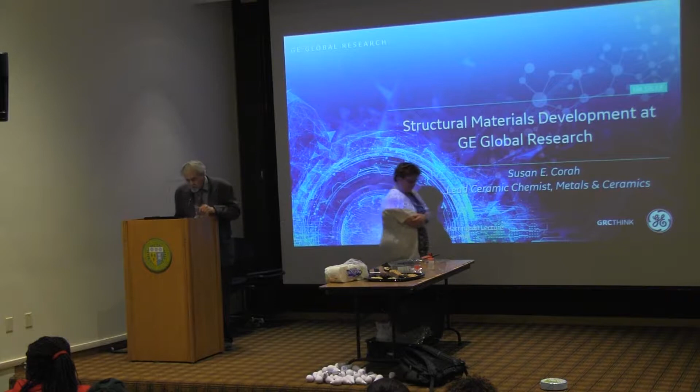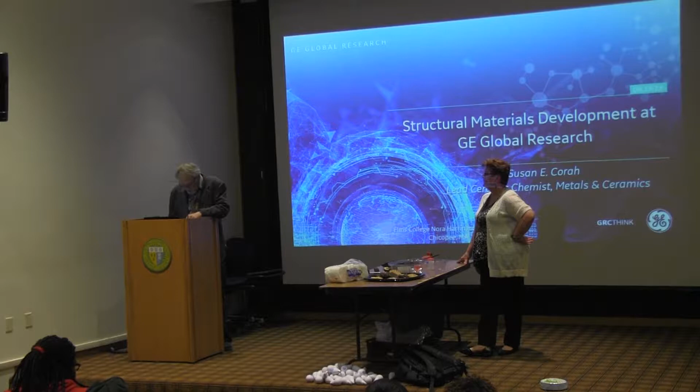This is the 35th in an annual lecture series established to honor the teaching service of Sister Nora Harrington. Sister Nora taught chemistry and physics at the Elms for 32 years, and in that time built a tradition of excellence in the teaching of physical science. We offer these lectures to you to promote inquiry and scholarship, ideals that Sister herself embraced. Although Sister Nora has passed, her legacy continues.

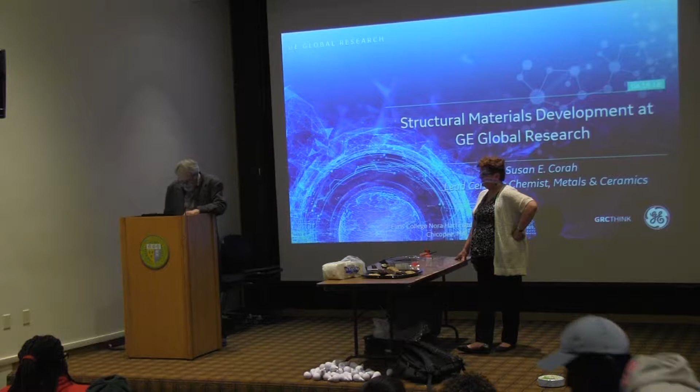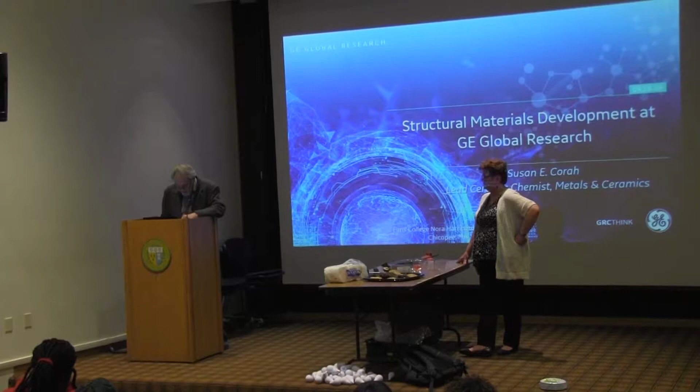It's my pleasure now to introduce our speaker, Susan Corah. Susan graduated from the Elms in 1981 with a BA in biology. Shortly thereafter, she graduated from North Adams State College in 1985 with a bachelor's in chemistry. Her first job was working as a research scientist at Sprague Electric Company in North Adams. Throughout her professional career, she has worked as a research scientist, chemist, and process engineer for different companies, as well as a quality engineering consultant for different laboratories. She started at GE Global Research in 2012. Today, she is lead ceramic chemist at GE.

She has an impressive record of accomplishment. She is the recipient of numerous awards at GE. In her professional life, she is the co-author of 5 U.S. patents. She will talk with us tonight about research at GE Global. The title of her talk is Structural Materials Development at GE Global Research. I give you Susan Corah.

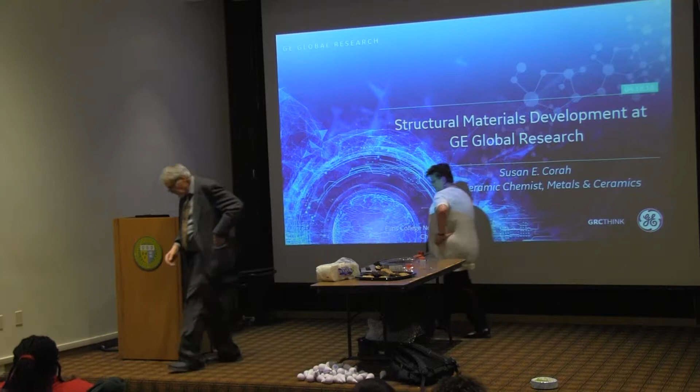Thank you very much, and thanks for being patient with my laptop. GE laptops are notorious for working extremely well in pressure-type situations. I'm sure you're all aware.

I'm going to talk to you about some of the work that we're doing at GE Global Research in Niskayuna on structural materials. Basically, structural materials are ceramics and metals, polymers, and composites. So we'll go through a number of slides talking about some of that and what the structure and mechanical properties mean. And then I'm going to shift a little bit over toward our aviation business because most of our structural materials organization focuses on the materials work that we do for aviation in Cincinnati and across the country. And there are some exciting developments with materials that have happened in the past couple of years.

And then on the poster, there's just a little reference to when pigs can fly. We'll talk about a particular composite material that's 25 years in the making and finally is getting on some of the aircraft engines.

So how did I get here from here? So, 81 graduate of the Elms, great experience here. A couple of my classmates are here. It's great to see them. We're going to go out and eat something later.

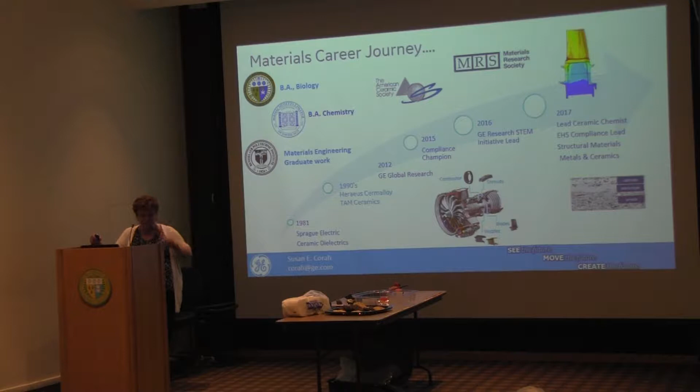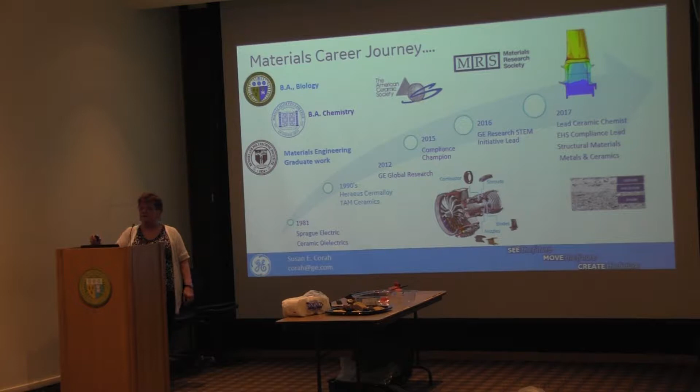I'm a lead ceramic chemist for my organization, and EHS compliance lead. Our new organizational structure is called Structural Materials, and I'm part of Metals and Ceramics. So we'll talk a little bit about GE in general.

How can you survive for centuries? GE was founded in 1892 in Schenectady, New York, a stone's throw from where our GE Global Research World Headquarters is currently. It was founded by the leading scientists of the day: Thomas Edison, Elihu Thomson, and Charles Steinmetz. They essentially built this research lab in somebody's backyard garage. They decided they wanted to have some sort of electromagnetic lab available for all sorts of innovations.

So GE Global Research itself was founded in 1900, and it's been going strong ever since. We go through lots of iterations on things that we focus on, but currently we're doing lots of work in support of our GE businesses.

So we have a very strong track record of innovation and invention. If you look at some of the things that have come out of the GE labs: 1879, carbon filament incandescent lamp; 1895, largest electric locomotive; 1896, first X-ray machine; 1941, first U.S. jet engine; and on through 2014 with our record-breaking hot gas turbine.

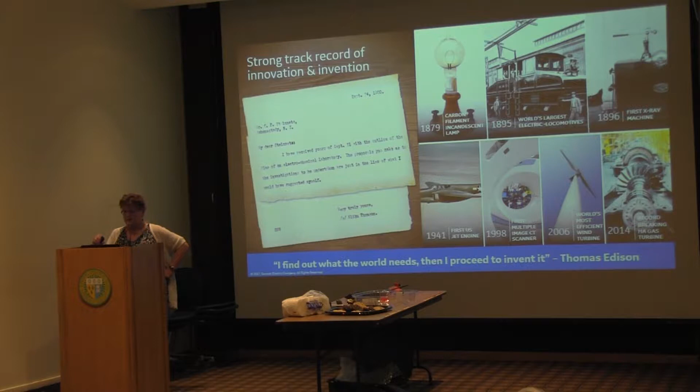So GE Global Research, we're the center of this circle. I tell graduate students a lot of times when I'm working with them, because they're used to the kind of research they're doing in their master's and PhD programs, that if you see the word research in our sign, it doesn't mean research for research's sake. We don't come in on a Monday morning and say, gee, I thought of this over the weekend, I'm going to go to the lab and do this.

We are business-based research. So if you see all the things our businesses touch here, power, aviation, healthcare, transportation, oil and gas, renewable energy, these are our customers. At GE Global Research, we behave almost like a manufacturing operation, in that the businesses are our customers, and like any manufacturing operation, we have deliverables and goals that we have to meet.

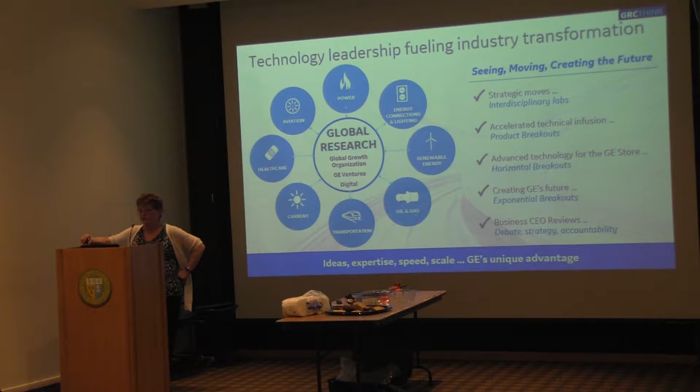So what exactly are structural materials? When you think structural materials, think of things that go into your cars or

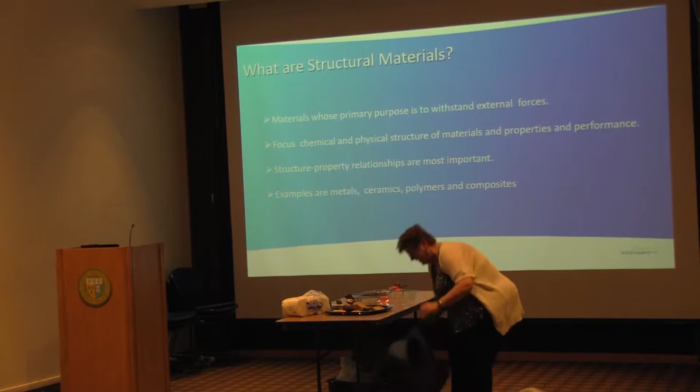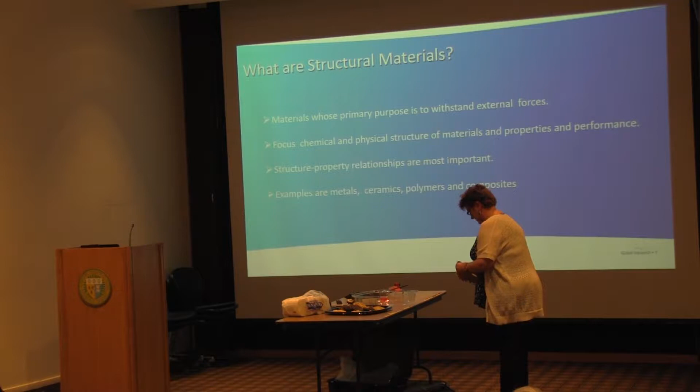That's my dog. Excuse me, sorry about that. So let me continue to talk about it. I knew there was something I forgot to do before I got up here. And no, my dog doesn't exactly call me. So,

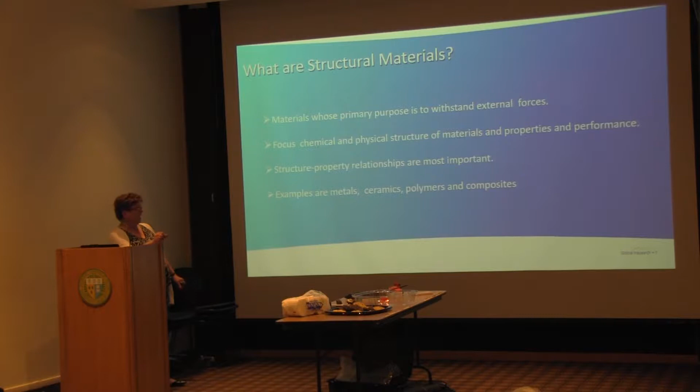the primary purpose of a structural material is to withstand external forces. It's got to be a really strong material. So we're looking at the chemical and physical structures of those materials, and we're aligning them with certain properties and performance. So we're actually looking at mechanical type performance for these materials.

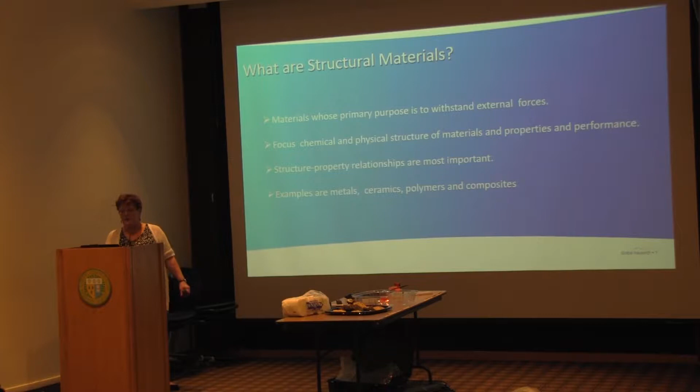Four examples of them are metals, ceramics, polymers, and composites. Composites are combinations of any of these kind of squished together. That's the technical term, squished.

So what does our team look like at GE Global Research? We have over 150 technologists that support structural materials. In Niskayuna, we have ceramics and metals, which is my organization, coatings, characterization, manufacturing, and materials behavior.

The materials behavior guys are the ones who do all the mechanical testing to determine whether or not the materials that we're creating actually are achieving what they were meant to do.

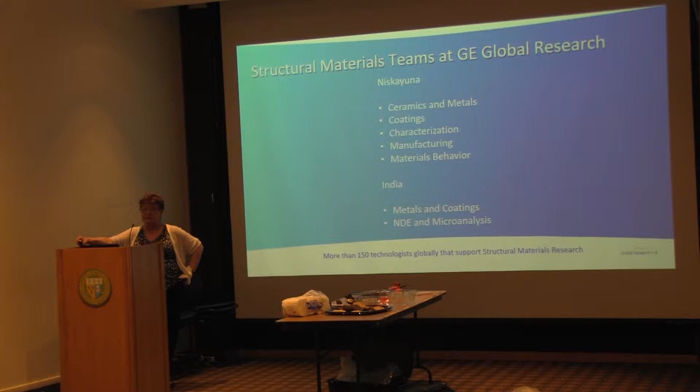In India, we have folks that work on metals and coating, and also non-destructive evaluation and microanalysis.

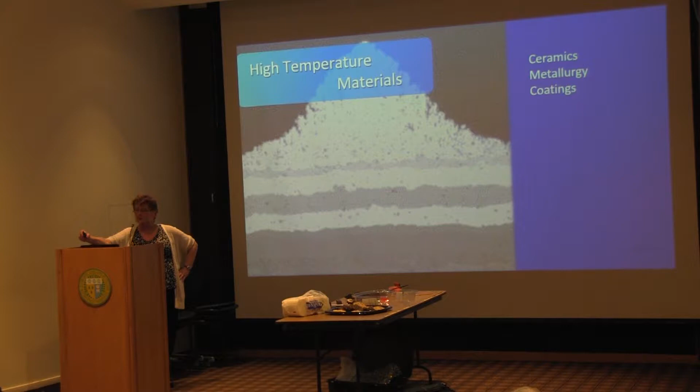So we're going to talk a lot about high temperature materials today, and of three different groups: ceramics, metals, and coatings. So we use some traditional metallurgical techniques. For example, this piece of equipment, it's a 1,000-ton forging press.

This is the very old-fashioned way that we're making new alloys that are better and stronger. One of the cool things that we do when we bring in our school groups—this is in my building, actually—we bring them in, and we have a great team of people who volunteer to do the demo for this.

They get all suited up in their safety heat suits, and especially for the little kids, it's very exciting because they take a red hot brick out of a furnace that's probably at about 2000 F or 2100 F. So it's blazing red hot.

It goes into the forge, they apply the pressure, the thing just smashes down to a circular bowl, and they take it from the press and put it in some cooling water, and steam is everywhere, and the kids are like, ah. It's very exciting. It's an old-fashioned technique, but it works very well for some of our processes.

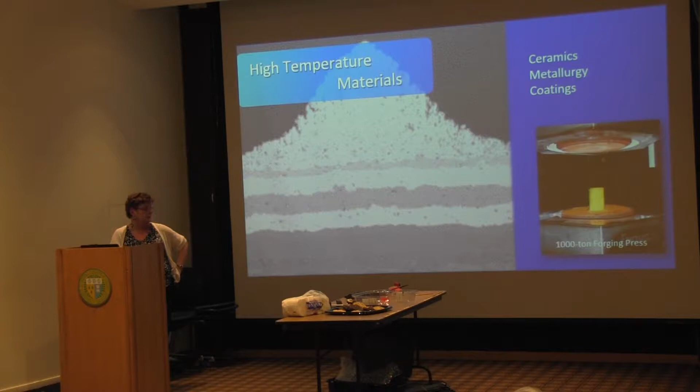And this right here is—I can't be standing here in 2018 and not mentioning something about robotic technology. That's become very, very big for us. But these actually are thermal spray robots, and this is actually an aviation blade.

We've gotten to the point with our materials, we can use this hot plasma spray and the two robots to actually get 12 degrees of freedom in which to spray our material onto the blade that's going to go into an engine somewhere. So it's very exciting stuff.

So why are we talking high temperature materials? If we're talking aviation, imagine you're sitting on an airplane down at Bradley and you're getting ready to go somewhere. There are three different conditions that we have to look at with regards to temperature: takeoff, climb, and cruise. So it makes sense if you think about it.

What kind of energy are you going to need on takeoff? You're going to need something that's very, very high energy, that is at a very high temperature. Temperature ranges on takeoff can probably be anywhere around 2200 F on those engines.

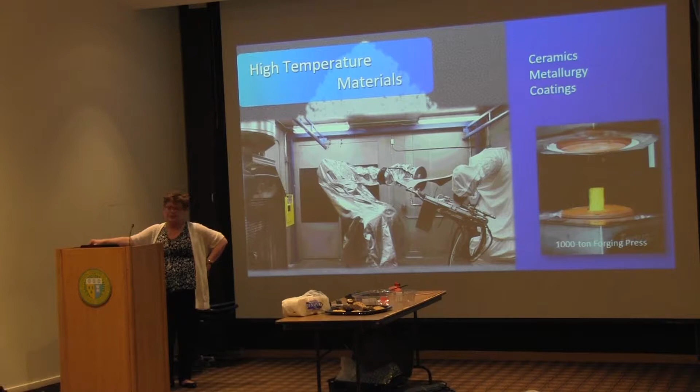And then consider climb. Takeoff requires a lot of energy. Climb also is going to require quite a bit of energy. And then you get to cruise altitude. Now at cruise altitude, your temperature is going to be a little bit less, but you're still going to be probably running about 2000 F.

So just imagine the kind of materials that you have to have on these engines in order to be able to be stable at these temperatures.

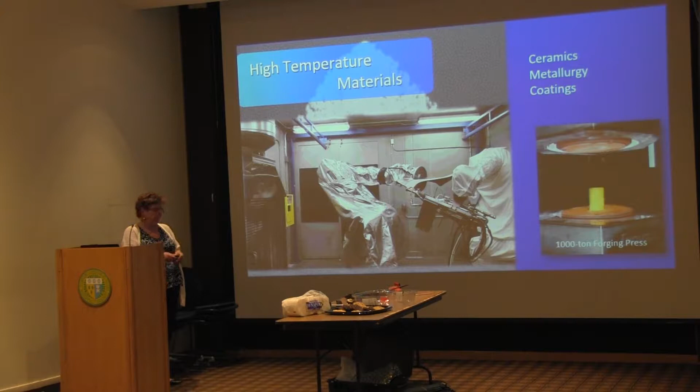So one very important part of what we do in structural materials is, as you can imagine, we do a lot of material characterization, because if we're looking at structure property relationships, we need to be able to have data that tells us about composition, mechanical strength, and several other types of characterization.

So internal capabilities—if we don't have them internally, you can see on the right, there are a few external partners that we work with, including a couple of universities.

So if we can't do it on site, we have partners that we can work with. We do imaging and analysis, and through that we can do some topography and chemistry of the surfaces.

We do a lot of X-ray diffraction. We also can do structural analysis through X-ray diffraction. We study crystal structure to see what the best crystal structures are for these materials.

We can do compositional analysis, because many of the materials we use, be it a metal alloy or some sort of ceramic thermal barrier coating or an environmental barrier coating, it's generally a mixture of materials, and it's good to have some compositional background behind us.

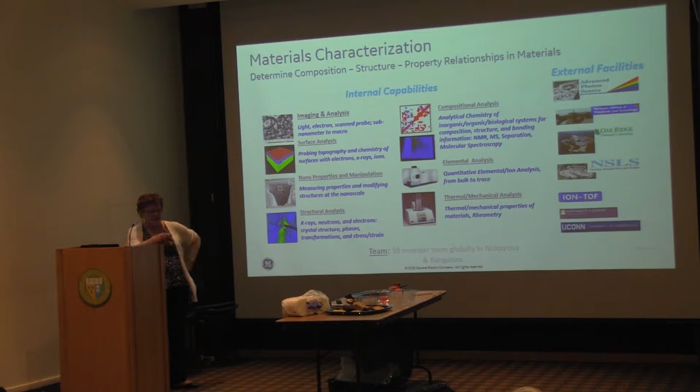A new technology that has emerged probably within the past 5 or 6 years is actually powder rheology, which is called rheometry. The pharmaceutical industry uses this quite a bit, and one of the basic important things you get from the data on this is a measure of flowability of the powder.

In its raw handling, most things that we work with start in a powder form. So we have ceramic powders, or metal powders, or metal alloy powders. Knowing how these things flow is very important.

So the particular instrument that's available now, top of the line globally, measures several different properties of a powder: flowability, tap density, bulk density, a lot of very valuable information.

For flowability, if you consider additive manufacturing, there are a couple of different ways that additive happens, but one of the ways is a laser melting process, direct metal laser melting. In that condition, flowability of powder is very, very important because it actually has to flow down a feed tube and onto the platform, and a laser will then hit it and melt it. So flowability is very important.

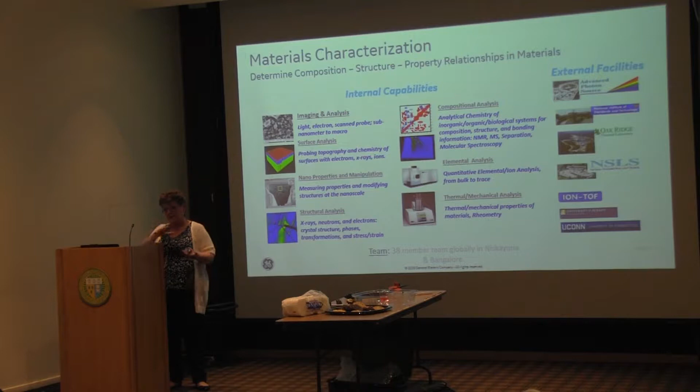The other thing we do a lot of characterization on is particle size and particle morphology, because, like I said, we start with powders all the way around, and it's important to know what kind of size particles you're dealing with, in terms of how many microns this is, or how wide the distribution is. Sometimes we use that data as an advantage to help us design a structured particle packing for maximum densification.

Okay, here we're going to talk just a little bit about two GE engines that are out in the field right now. On the left, this is the GEnx, and this is the GE 9X.

So the materials that we use on these, very important alloys: nickel, titanium, and iron, as well as combining them with different ceramics and polymers.

So we talk about some of the process technologies here. There are castings that are involved with ceramics where we actually develop a mold that then is covered in wax, and we're actually able to use that model to make the metal castings for some of the blades.

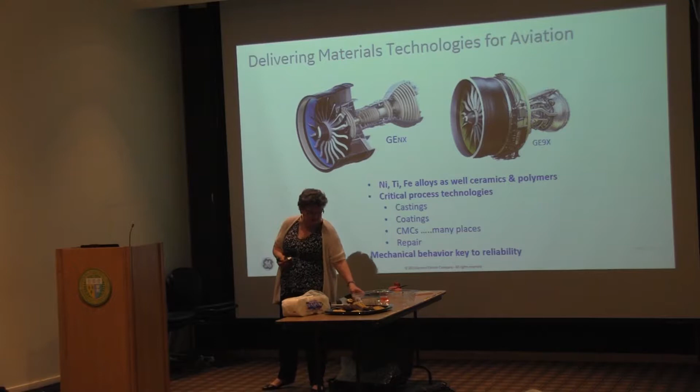And I have this actual ceramic casting of an engine blade. I'm not exactly sure which one it's from, it might be from the LEAP engine. But from this ceramic casting, we can go to a casting house and come up with this piece of an engine blade.

Coatings are also important. We have two types of coatings that we work with regularly: environmental barrier coatings and thermal barrier coatings. Both of those coatings are meant to protect the alloy or the bond coat that's underneath it. Thermal barrier coatings are developed to withstand very, very high temperatures, and ultimately will protect the hardware that's underneath it. I think a little later on we have a picture of that.

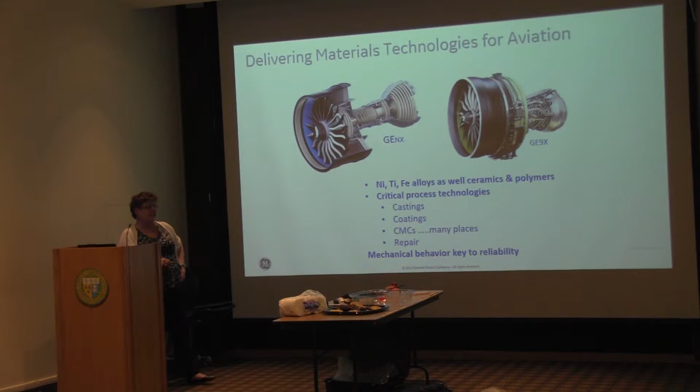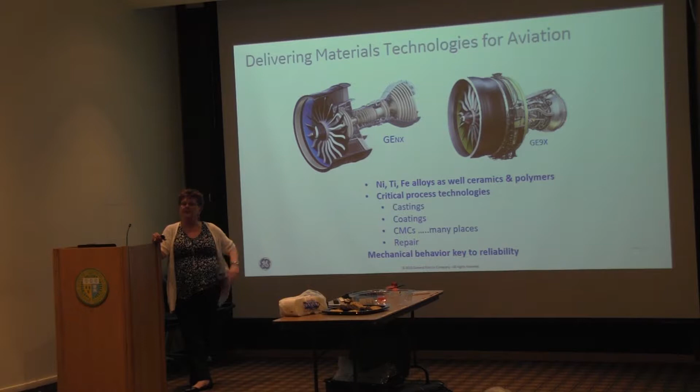That's what they're looking for. The other thing we do is something called repair, and we're working on some in-situ repair type scenarios. We have materials available now where when an aircraft engine comes in for inspection, if there are any defects, we have the means to go in and actually repair those on wing.

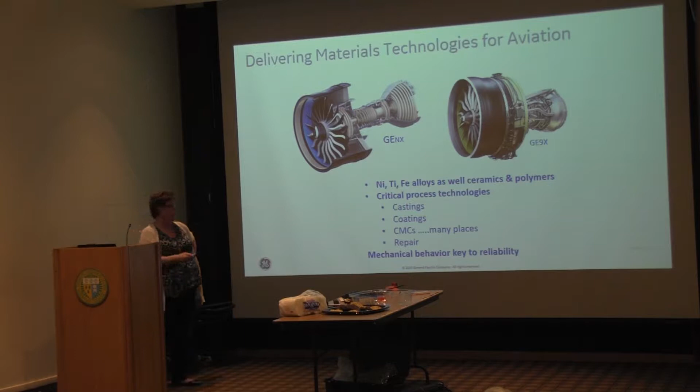Oh, and these are videos that don't work. I'll share them with Dr. Drake when I get back to work tomorrow, and he can share them with you guys if you want to see them. What these actually are, I have to tell you, I watched them for the first time yesterday. It's a really sexy video of the whole engine, and it all flies around in pieces and parts. It's very impressive. I'm sure you would have liked it if it had worked. But I can pass those along to you if you're interested.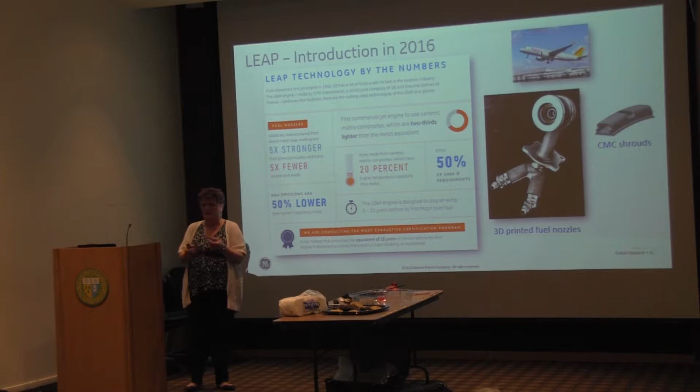You've got fuel nozzles that are additively manufactured. Through one of the processes we use, whether it's DMLM or another one, it's 5 times stronger. Because it's built in one piece, there are 5 times fewer brazes and welds. Consider a fuel nozzle that's traditionally built - in order to put the whole thing together and make it very uniform, it has to be brazed or welded to make sure all the connections are made. But when you 3D print something like this, you don't have as many opportunities where you have to have a braze or weld. So NOx emissions are lower.

Everybody loves that. And this is the first commercial jet engine that uses ceramic matrix composites, and we'll talk a little bit about how those are made. It's two-thirds lighter than the metal equivalent. That's a lot - that is significant here.

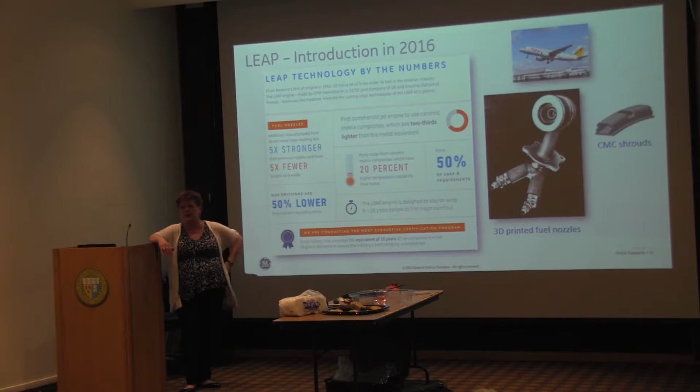This is designed to stay on wing for 8 to 10 years before the first major overhaul. That doesn't mean they don't come in for inspection or what's called an outage, which sounds like a really weird word to use, but there are scheduled outages for most of these aircraft engines - a determined schedule, a determined amount of time when an engine has to come off and be inspected or replaced. But this is designed to last significantly longer. And there's your 3D printed fuel nozzle, and this is a CMC shroud.

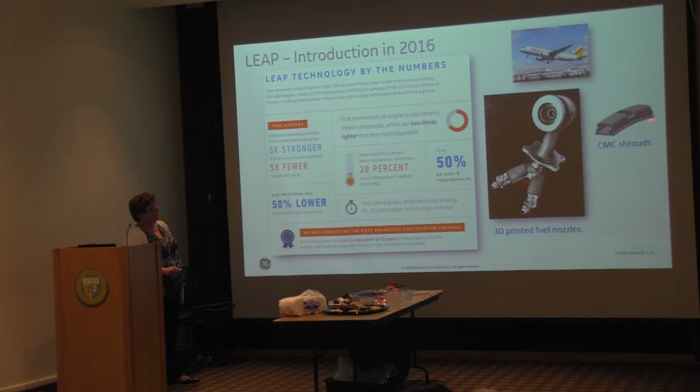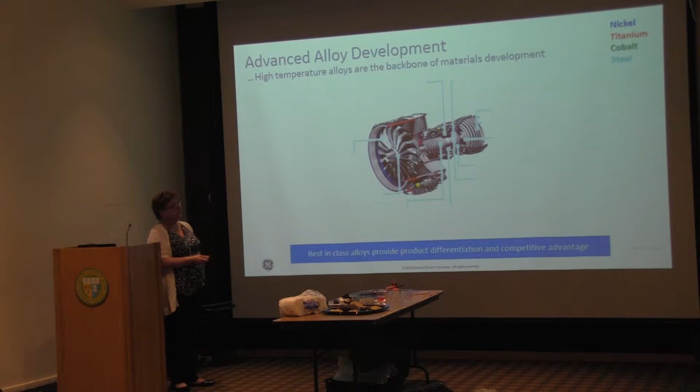So what kinds of alloys do we use on these engines? There are four: nickel, titanium, cobalt, and steel. The nickel alloys are found in the blades shown here and some of the rotors. We've got some nickel alloy seals in this part of the engine, and then high temperature nickel alloy for the blades and vanes here. The titanium alloys are found - it's a titanium aluminide - in the blades here, and then we've got a fan and a rotor that is the titanium alloy here.

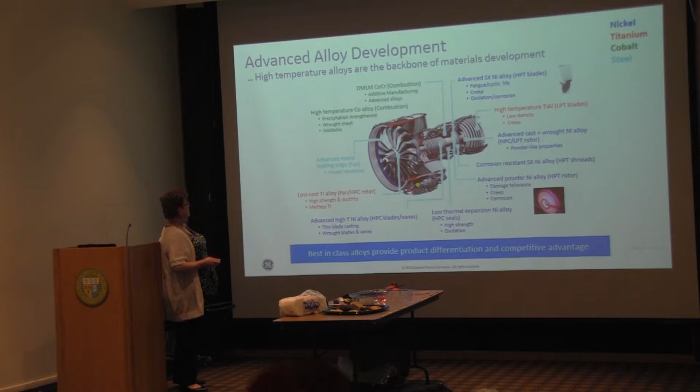With cobalt, this is the DMLM cobalt combustion - that's the direct metal laser melting portion. Also in the combustor liner, we've got high temperature cobalt alloy. And then with steel, we've got it right here, the leading edge on the fan blade.

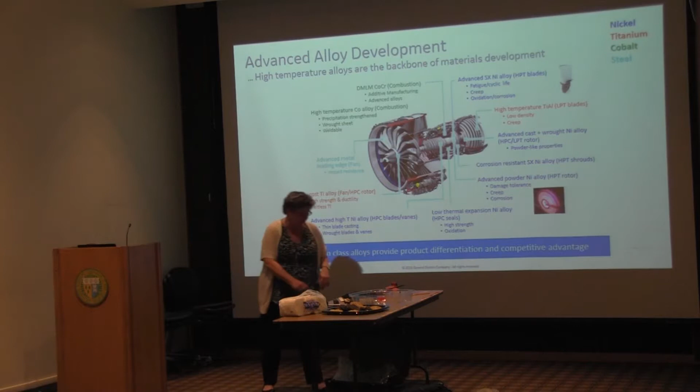So what's a leading edge? The way the fan blades are put together, a leading edge is the edge that actually sees the environment first when it's on an engine. If you think about it, that provides probably the best opportunity to have problems with environmental issues hitting the edges. So if we have coatings, we may find much more deterioration on the leading edge than on the rest of the blade.

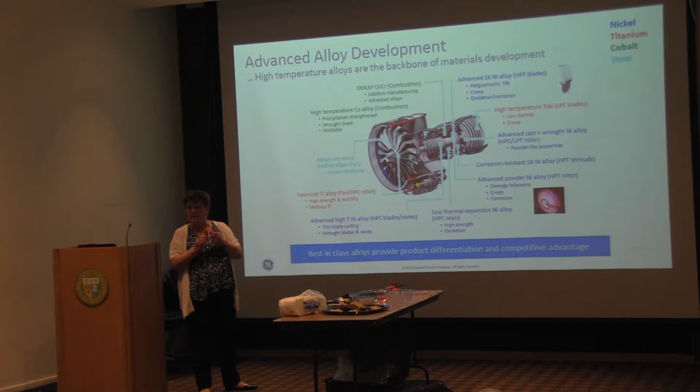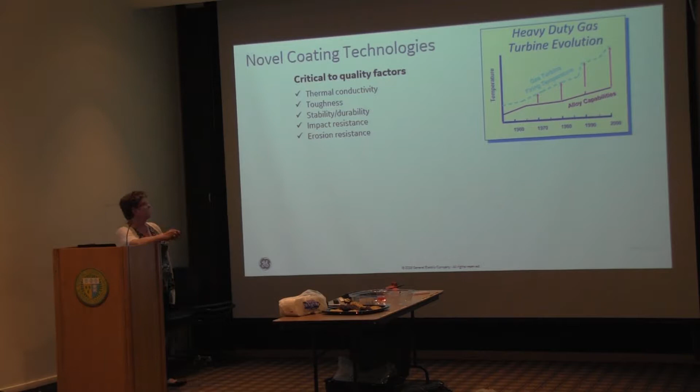We have some novel coating technologies that I'll go over briefly. The critical to quality factors we're looking for include thermal conductivity, toughness, stability, durability, impact resistance, erosion resistance, and the last one is CMAS resistance.

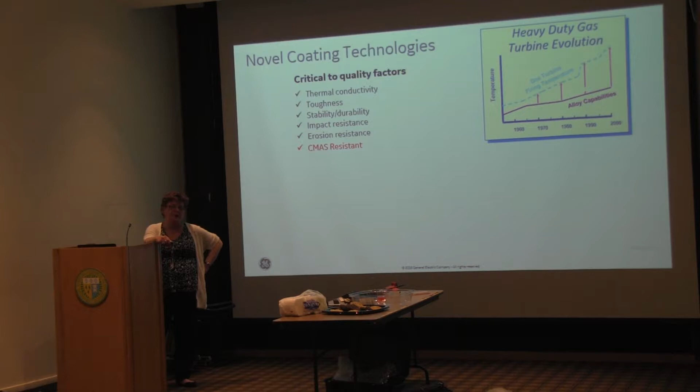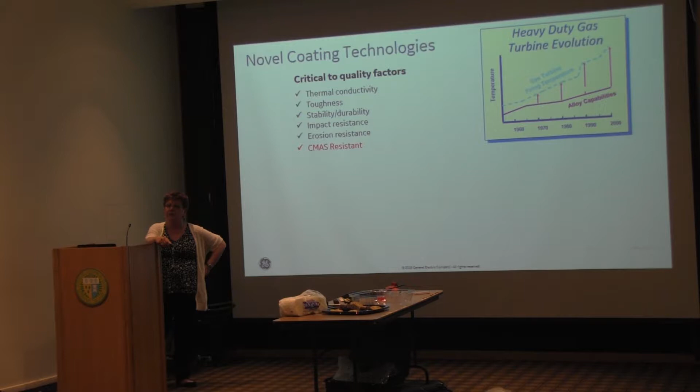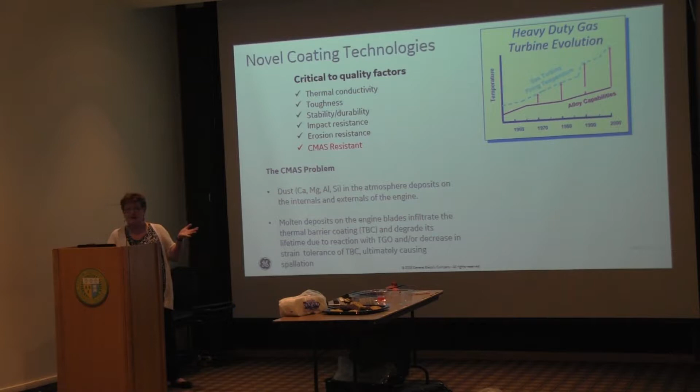Think about an aircraft engine flying in the Middle East. There are different environmental factors that engine will run into that you don't see flying in the States or other parts of the world. Essentially, CMAS is a combination of calcium, magnesium, aluminum, and silica. It's a silicate, essentially a glass. The problem is that it deposits on the engine blades and eats through the thermal barrier coating, decaying it.

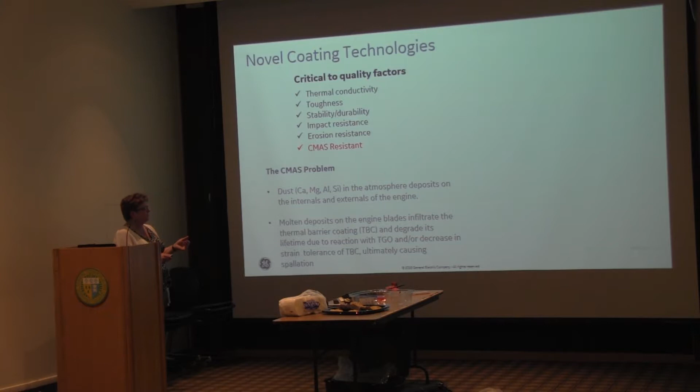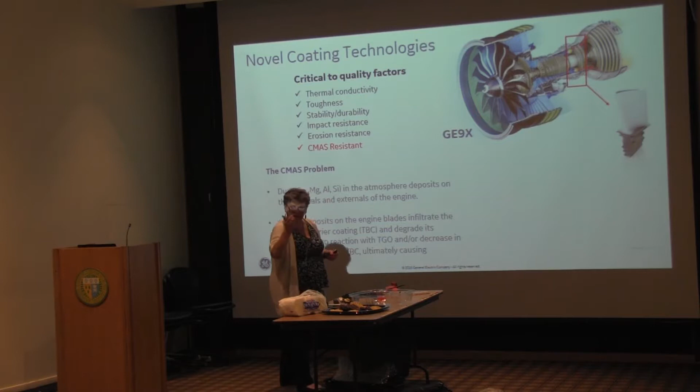So these are the blades, and this one actually has a TBC coating on it. If you see, this is a bare blade, and this one has the coating. This is a piece of hardware, the same blade, that's actually been fielded and taken off of an engine.

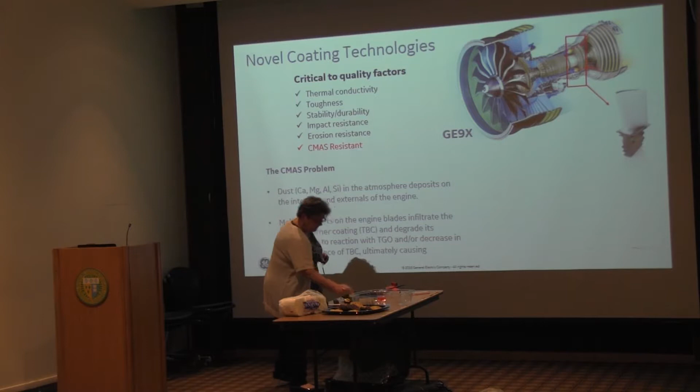This is kind of how the composition goes on many of these parts. Here's your super alloy substrate, whatever we talked about on the slide before. You've got a bond coat here, which bonds the alloy to this thermal barrier coating, a zirconia composition ceramic material. By putting this thermal barrier coating here, we can get to a higher firing temperature, reduced cooling air, and a longer component life.

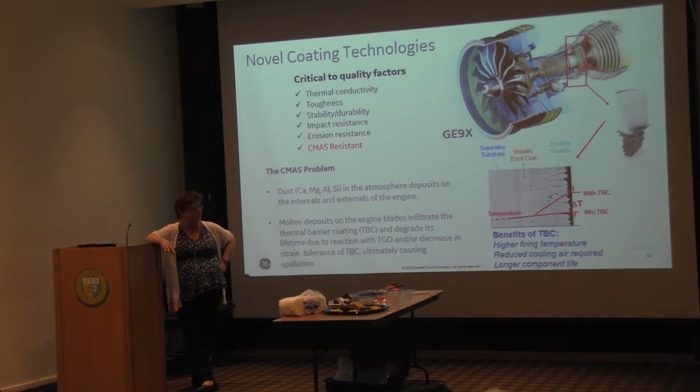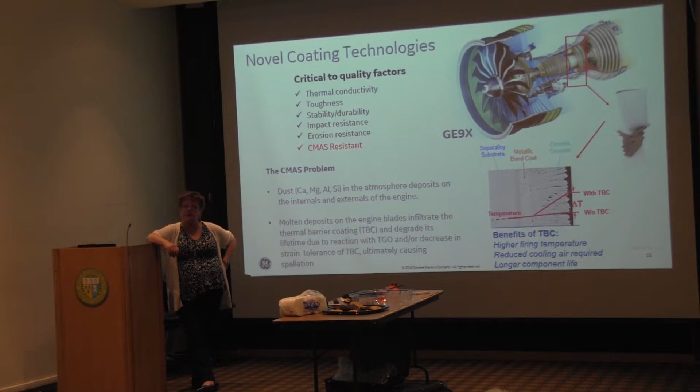If you're thinking about this, you might ask, how are you going to sinter something that's already on an engine? What we do is use the high temperature cycles to actually sinter the ceramic material that's on the blade. So no additional steps are needed—it just sinters as the engines are cycled.

We have to do a little bit of robotics here because it's 2018 and it's cool. So there's something we've developed called Turbine Surgeon. These are actually little tiny robots that can be deployed inside the engine, going in between some of these blades, doing a different type of inspection.

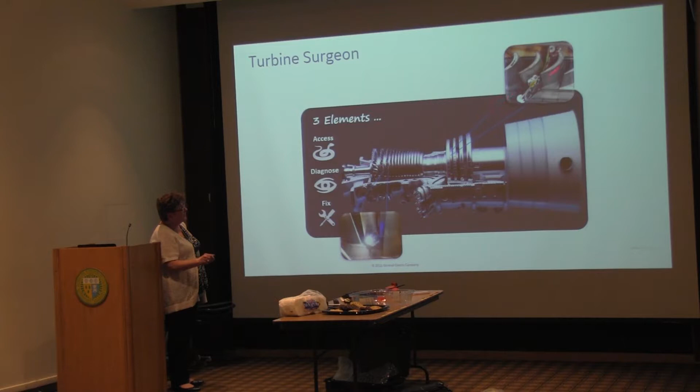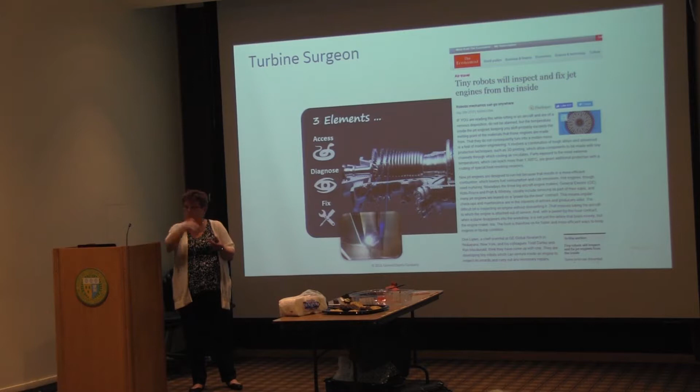Tiny robots will inspect and fix jet engines from the inside. This is part of my team—I work with these guys. It's very exciting. Our robotics professionals here have the coolest little robots called crawlers, little mini robots that can crawl around in the engine and do an inspection. They also have magnetic crawlers, which are very beneficial if there's magnetic material we're using there, because they don't fall off the surface as they're going through. It's a pretty exciting time for this.

Are you going to go? Oop, sorry, one back. All right, so old inspection technology.

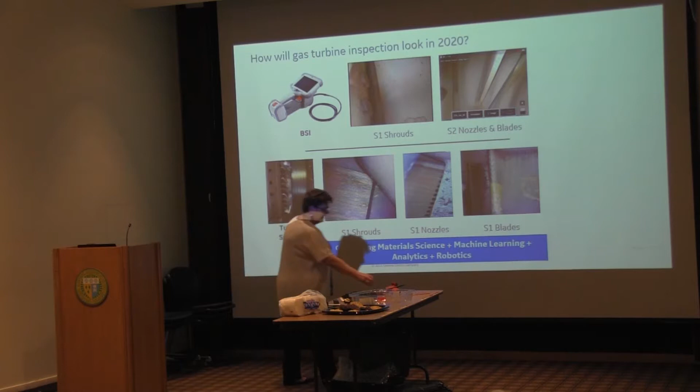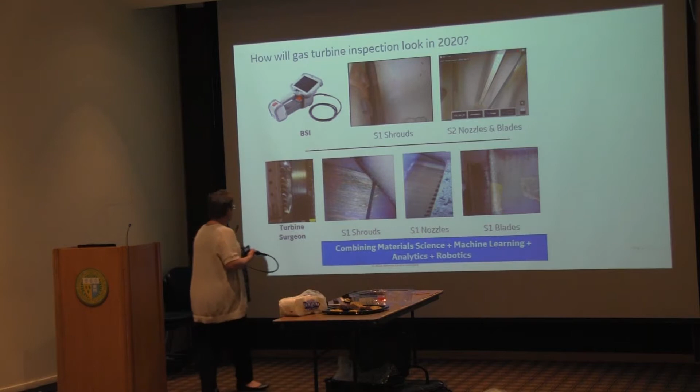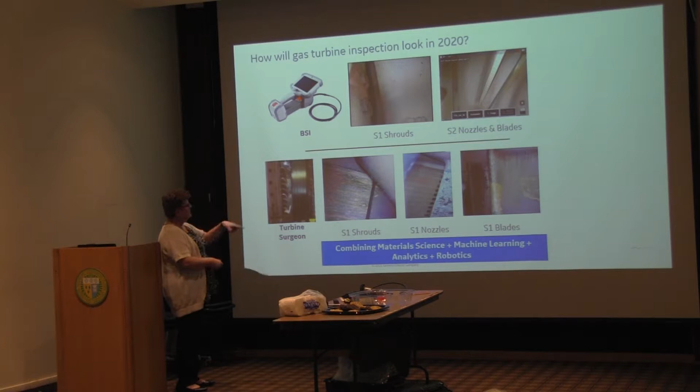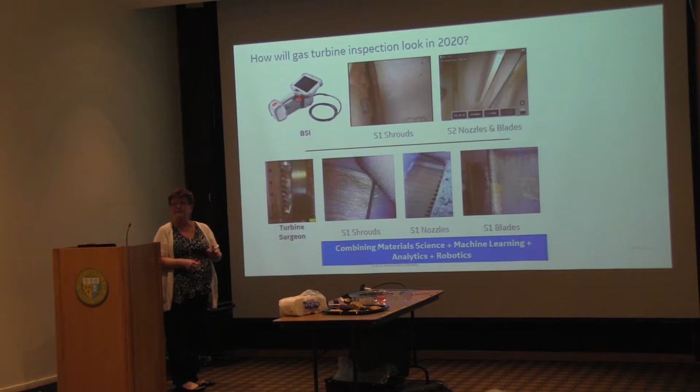This is a borescope, basically a fiber optic on a handle. You turn it on, and most engines are engineered and designed with borescope holes at strategic locations, so you can use this inspection tool. You go in, maneuver it around, and try to see what's going on between the blades. That's old technology. The new technology is the Turbine Surgeon—another one of those videos that's not working, sorry about that—but the robots go in and can inspect shrouds, nozzles, and blades much more efficiently than manually manipulating the fiber optic cable, which is difficult to do if you don't know what kinds of surfaces you're looking at.

All right, and a little bit about ceramic matrix composites, CMCs.

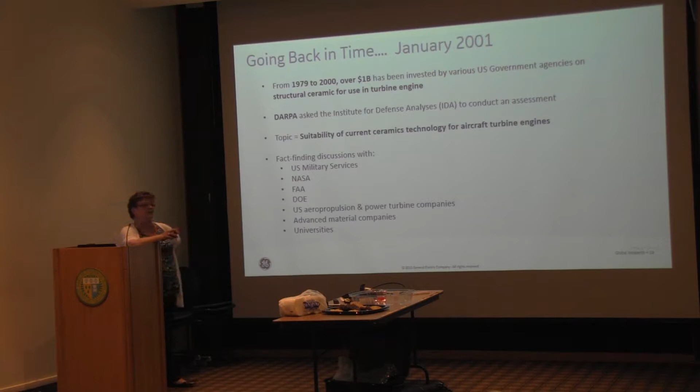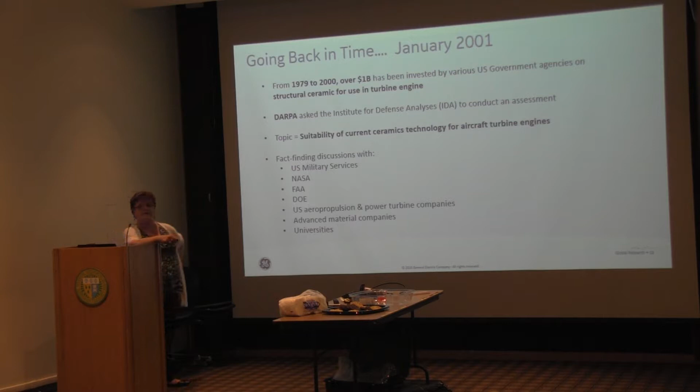Back in January 2001, we were trying to figure out what kind of structural ceramic you could use in a turbine engine. DARPA asked the Institute for Defense Analyses to do an assessment and see what opportunities might be there. Many government agencies were involved in these discussions, and here's what they determined. The title of their report asked: will any ceramics be on engines? Will pigs fly before ceramics do?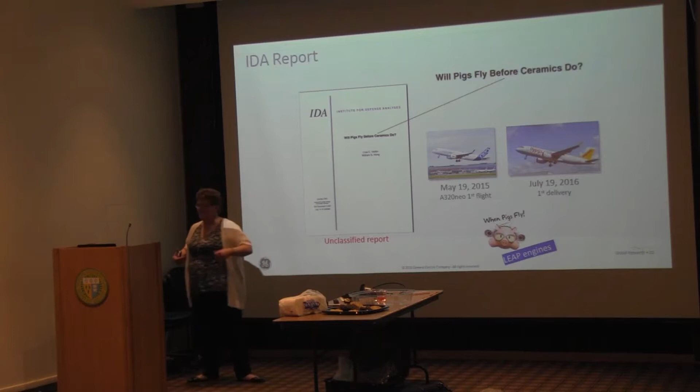When pigs fly. I was telling them they should make little pigs with engines on the side. They would be great giveaways for talks like this.

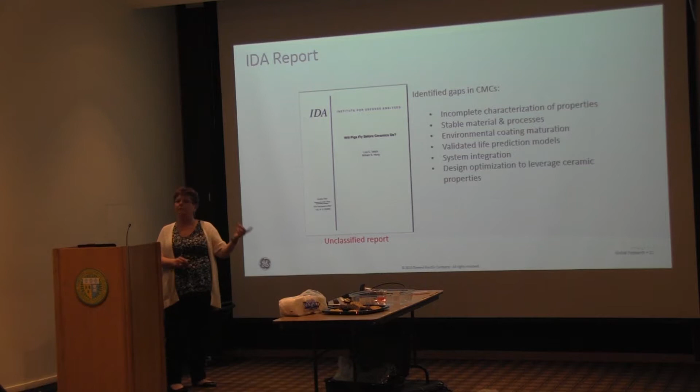So what the report did for us in the first place, it identified a whole bunch of things that weren't being done at the time - incomplete characterization, not great environmental assessments, and system integration. So we had to do a lot of work in order to overcome all this.

If you look at this big timeline of revolution for ceramics - at 500 BC, ceramics is art. It lasts a millennium unless you drop it, and then you have nothing. In the 1960s, missiles and rockets, and of course the ceramic tiles on the space shuttle.

So I have one of those tiles here. This is an alumina silicate type structure, but it's not very dense. It's got a crystal structure that's very different, almost fibrous. And all that goes over these ceramic tiles on the shuttles from back then - it's just a 16th inch piece of aluminum that goes on top of these, and this is the whole insulating piece here.

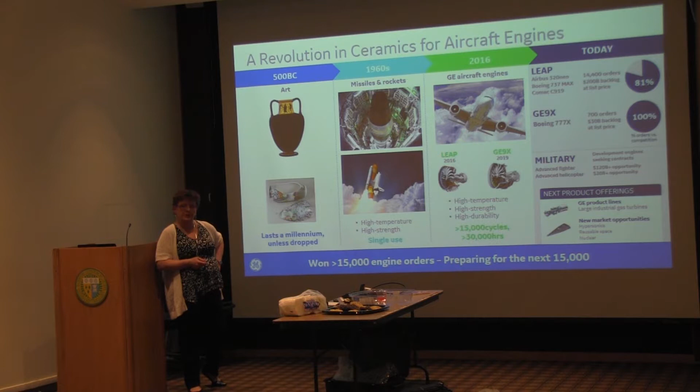So where did we go from there? Now in 2016, we're in aircraft engines, we're in the LEAP, we're in the 9X. So things have come a long way, and they're only getting better because more ceramic parts are being produced that are going to go into engines. It'll make them lighter, and it will make them more fuel efficient.

So ceramics as a whole, if you look at this timeline, 1990 to 1999, CMC via a particular process called melt infiltration. There's a pre-impregnation tape - the CMC as a composite is almost like a tape. We'll go through a little bit of this. Here's our flying pig right here.

Gen 2 EBC, this is an environmental barrier coating. A lot has happened since the 1990s here. And when we've gotten to the point of 2010 and above, we're at our ceramic components in our jet engines.

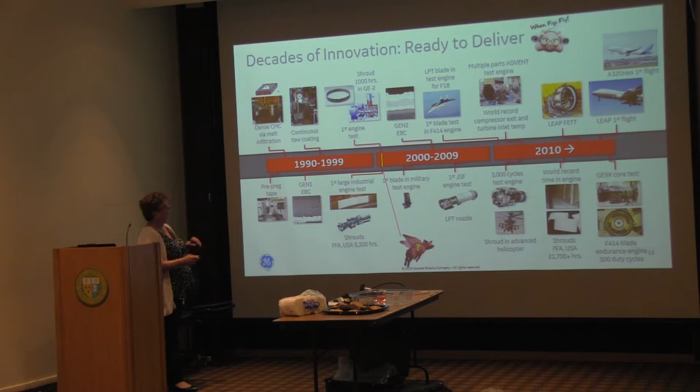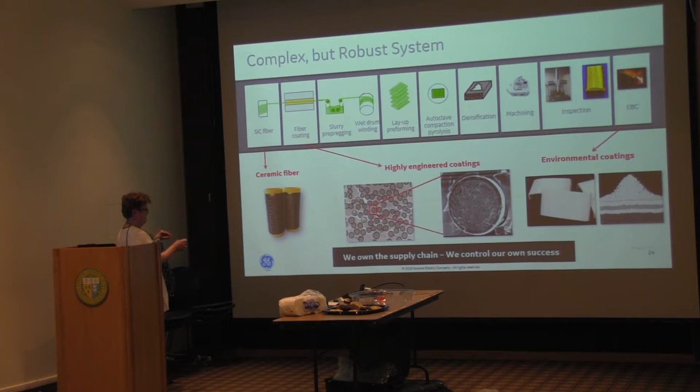So what's a CMC? This is a really complicated system - this is why it's taken so long to develop. You have a silicon carbide fiber here, and it gets coated, impregnated in a specific slurry of a proprietary composition, and then it's wound onto a drum. Then it has to be preformed, compacted, densified, then machined and inspected, and then the EBC goes on top of it. So it's a long time coming, but we own our supply chain, so we control how well this does.

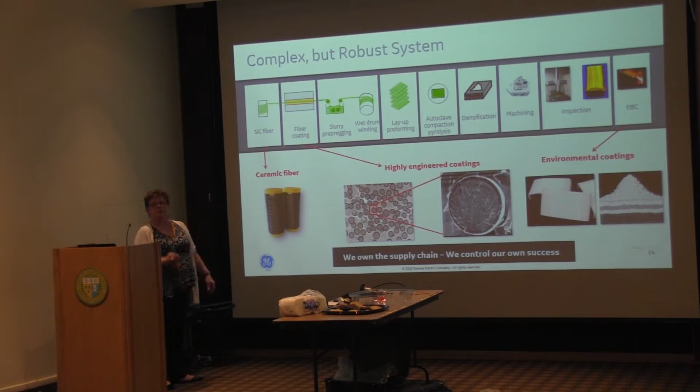So from imagination to mass production, we're imagination at work. We used to be, we brought good things to life, but I guess we don't do that anymore. We imagine.

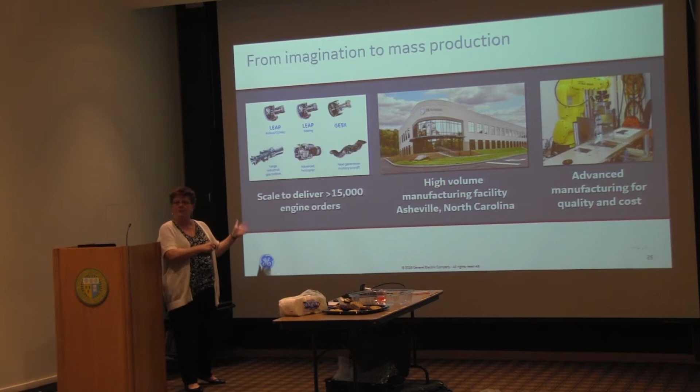So we have gotten to the point where we've got scale up. We have our manufacturing facility that's in Asheville, North Carolina, and we've got advanced manufacturing techniques that we're using, including a bunch of robotics on this.

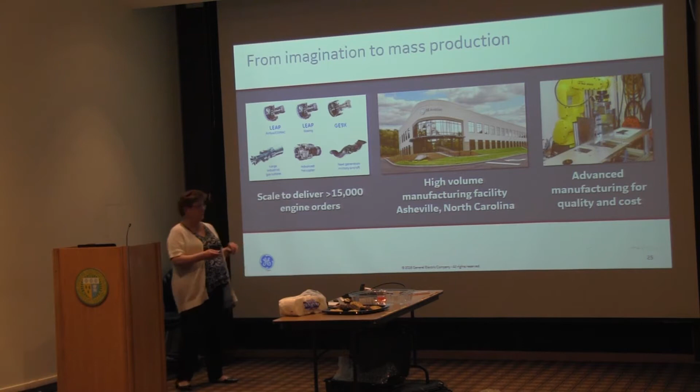And the whole purpose of this particular facility is for airline people to send in their repair technicians, for them to be able to work on repairs directly on the engine that they're going to see if they're in a hangar at an airport somewhere. And these classes run all day long, all week long, and repair techs are in all the time.

It also gives us an opportunity, if we have some innovative testing or something new that we want to try to put on one of these, occasionally they'll allow us in there and give us access to one of the engines. So if we're designing some different kinds of inspection tools, we actually have the right geometry of the inside of the engine so that we can work directly with how it would be seen in the field.

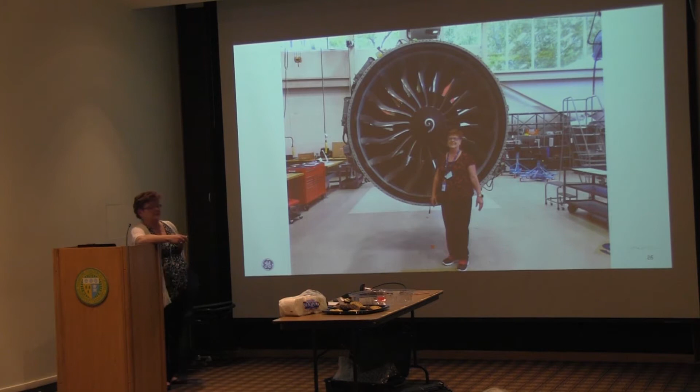So it's a big thing. It's a big thing. There's tons more we could talk about.